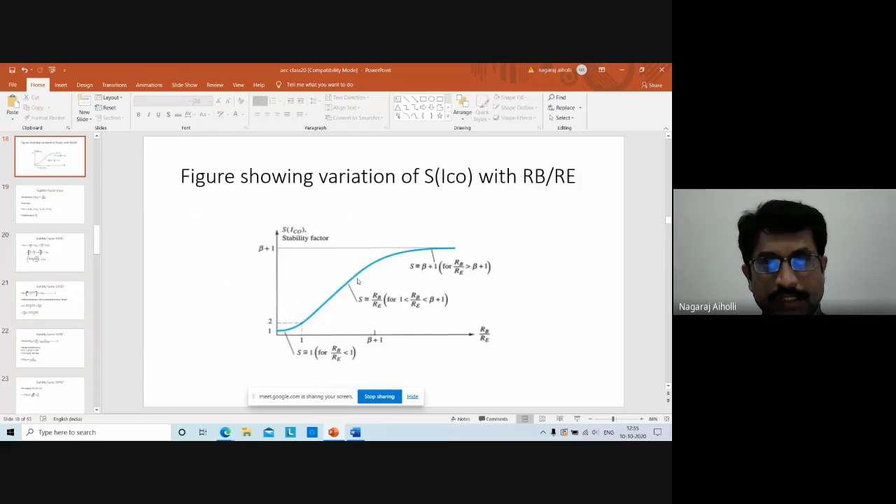In yesterday's class, we had discussed the stability factor, right? We had considered the emitter bias circuit, S of beta. We have derived that. So to derive the S of beta equation, we find delta IC by delta beta, but we don't differentiate IC with respect to beta; we perform delta IC by delta beta.

To perform delta IC by delta beta, we have to take the input loop and write the equation for the input loop in terms of IC and IB, because IE is approximately equal to IC, and IC is equal to beta times IB, or IB is equal to IC by beta. So we'll get the equation in terms of IC and beta for the input loop of the emitter bias circuit.

If I take this VB to the other side, it will be VCC minus VB. Then I will take two conditions: IC equal to IC1 and beta equal to beta1 at temperature T1, and IC equal to IC2 and beta equal to beta2 at temperature T2. I write the equations for IC1 and IC2, then I divide equation 4 by 3. On simplification, I get this equation.

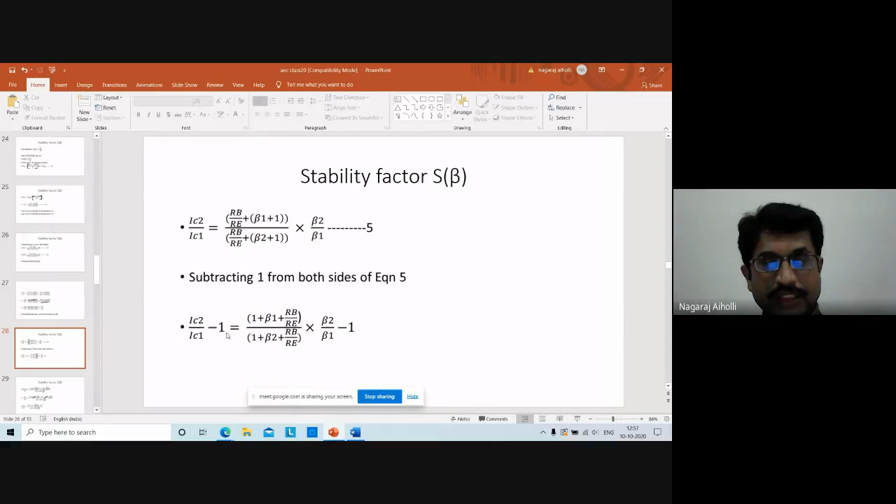IC2 by IC1 is equal to RB plus beta1 plus 1 into RE into beta2, divided by RB plus beta2 plus 1 into RE into beta1. If I divide numerator and denominator by RE, I get this equation. Then I'll subtract 1 from both sides of the equation, on LHS and RHS, and simplify it further.

On further simplification, I get delta IC by IC1 is equal to beta2 minus beta1 plus RB by RE into beta2 minus beta1, divided by beta1 into 1 plus beta2 plus RB by RE. Now I'll express it in terms of delta IC by delta beta. Because beta2 minus beta1 is common in the numerator, I take it as common: beta2 minus beta1 into 1 plus RB by RE, divided by beta1 into 1 plus beta2 plus RB by RE.

The delta beta goes to the LHS denominator, and IC1 comes to the numerator on the RHS. So the equation is delta IC by delta beta, that is S of beta, equal to IC1 into 1 plus RB by RE, divided by beta1 into 1 plus beta2 plus RB by RE.

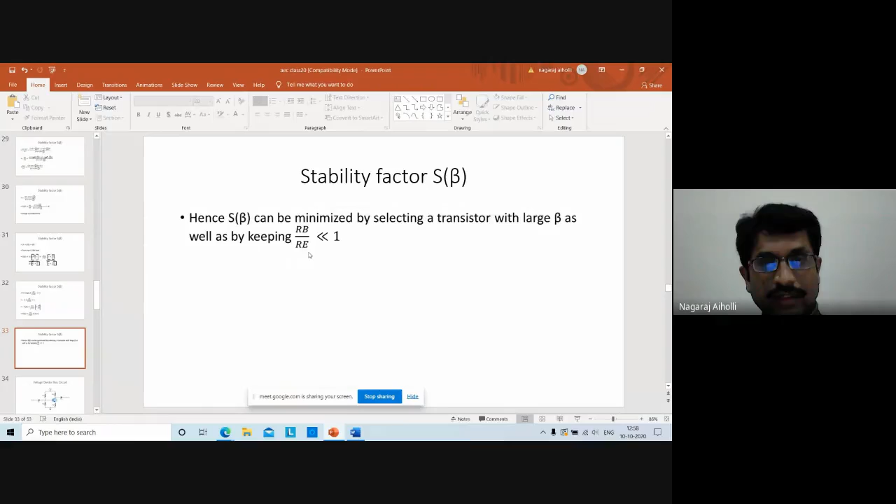Then we consider the design considerations. 1 plus beta2 is approximately equal to beta2, so we simplified S of beta. For S of beta to be minimum, beta has to be large, or 1 plus RB by RE should be lesser, that is RB by RE should be less than 1, so that S of beta is also less. S of beta is directly proportional to 1 plus RB by RE.

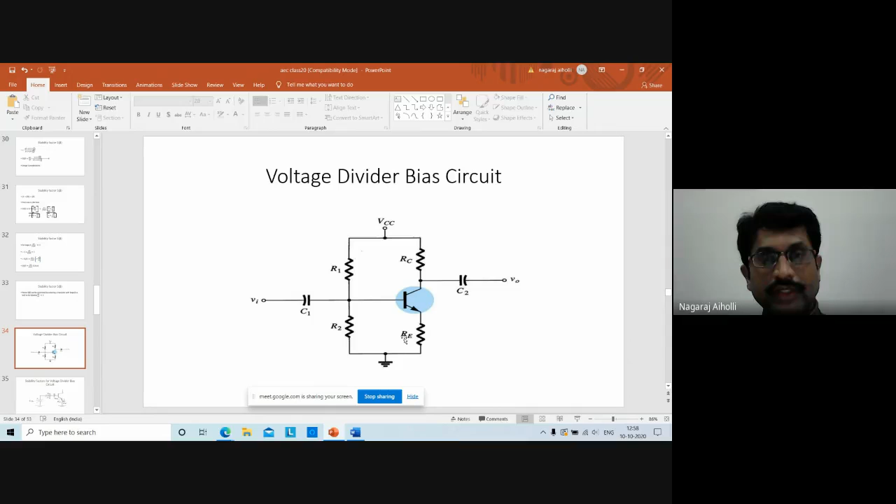Then later we took up the next circuit, that is the voltage divider bias circuit. We applied the input path, input loop. Okay, we got the equations. Then I expressed IE in terms of IB and IC for the input path equation, that is VTH is equal to RTH IB plus VBE plus IE RE.

Then I differentiated this above equation. Now I am getting the stability factor S of ICO, right? For S of ICO, what we have to do? We have to take the equation of the input loop. Once we get the equation of the input loop of that circuit, then differentiate that with respect to IC, keeping VBE constant, because I want the equation in the form of dou IB by dou IC.

That is what is required, because the general expression for S of ICO is 1 plus beta divided by 1 minus beta into dou IB by dou IC. So I want the expression for this, dou IB by dou IC. Then on further simplification, I get the equation in the form of dou IB by dou IC. This I will substitute in that general expression.

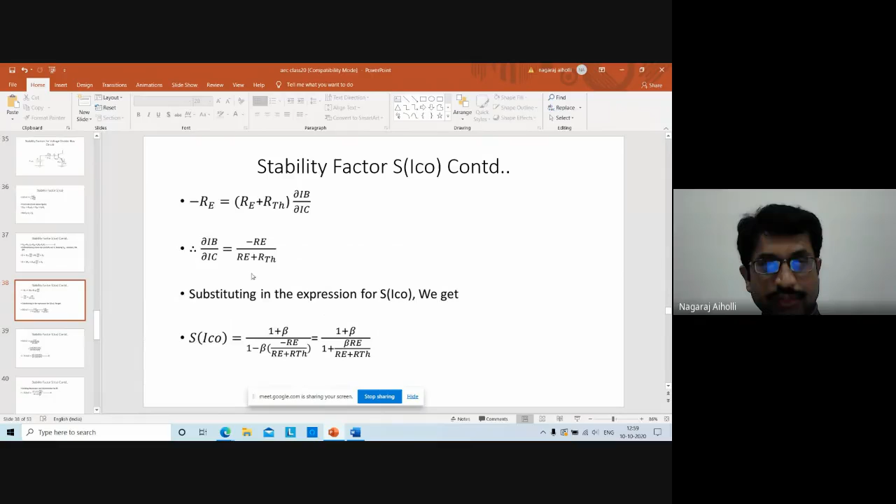So on further simplification, I will get the equation as S of ICO is equal to beta plus 1 into 1 plus RTH by RE, the whole divided by beta plus 1 plus RTH by RE. Okay. So we had discussed up till here. Next, in continuation, design considerations. So for the S of ICO we derived in yesterday's class, we have to consider a few of the conditions.

So the condition that we are considering is this: beta plus 1 into RE is greater than RTH. Here RE is the LCM. So beta plus 1 into RE plus RTH divided by RE will come in the denominator. Yes or no? What will be in the numerator? If you take RE as common, it will be beta plus 1 into RE plus RTH divided by RE.

In the numerator we have beta plus 1 into RE plus RTH by RE. In the denominator it will be beta plus 1 into RE plus RTH divided by RE. So RE in the numerator and RE in the denominator will get cancelled. The condition is beta plus 1 into RE is greater than RTH.

Therefore, S of ICO will be approximately equal to beta plus 1 into RE plus RTH; RE in the numerator and RE in the denominator have got cancelled. Then in the denominator, because beta plus 1 into RE is greater than RTH, we get simply beta plus 1 into RE. Right? So beta plus 1 into RE plus RTH divided by beta plus 1 into RE. This is the expression for S of ICO.

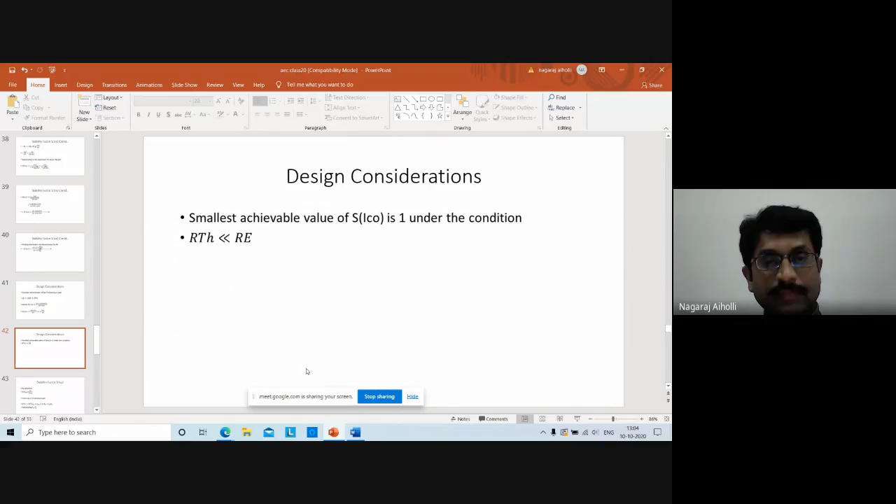Next, stability factor S of VBE. First we derived S of ICO. This is the S of ICO equation, what we did yesterday, and this is a design consideration for S of ICO. Next we will be deriving S of VBE. For which circuit? We are studying which circuit here? Voltage divider bias circuit. Is it not? Equation for S of VBE is dou IC by dou VBE.

Dou IC by dou VBE from equation 2 of the previous topic, or you can directly apply the KVL equation to the input path of the voltage divider bias circuit. So if you apply the KVL equation to the input path, the equation that we get is VTH is equal to RTH IB plus VBE, because there is VBE drop, there is RTH Thevenin's resistance, and equivalent Thevenin voltage is VTH. VTH is equal to RTH into base current plus VBE plus IE into RE.

Actually, it is IE into RE, but IE is expressed as IB plus IC. So we get IC into RE plus IB into RE. IE is IB plus IC, right? Expand that IB plus IC into RE. So IB into RE plus IC into RE, correct? Now next we have IC is equal to beta into IB. Yes or no? IC is beta times IB, or IB is equal to IC divided by beta.

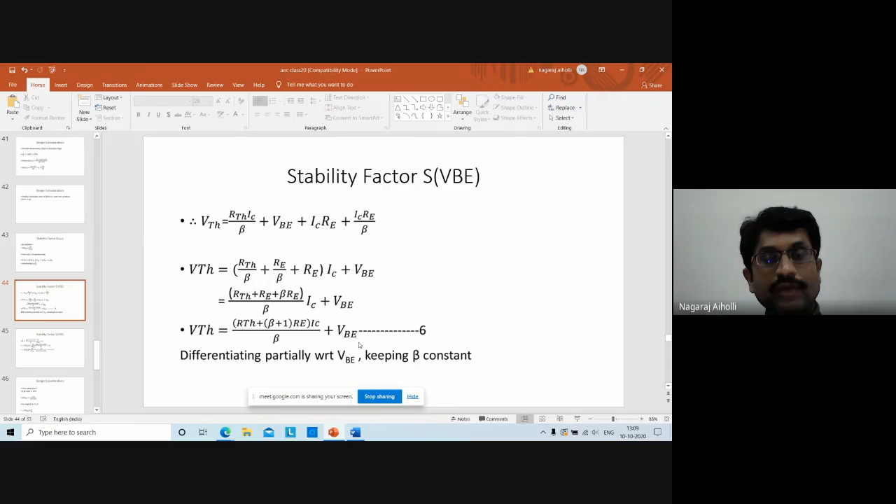So constant into differentiation of IC. Differentiation of IC is how much? We are differentiating with respect to VBE, so we get dou IC by dou VBE. Then differentiation of VBE is how much? What is the differentiation of VBE with respect to VBE?

Mahadev, can you tell me? Mahadev? Mahadev Adair? Mohammed? Mohammed?

Differentiation of VBE with respect to VBE is how much? We are differentiating with respect to VBE. So if we differentiate VBE with respect to VBE, what will we get? 1. Correct, you are right. It is 1. So it is plus 1. Differentiation of VBE with respect to VBE is 1. Fine.

Therefore, we will simplify it further. So S of VBE should come next here. It is dou IC by dou VBE multiplied by RTH plus beta plus 1 into RE by beta, equal to -1. This plus 1 I will take to the other side; it will be -1. I'll rearrange the terms and I get the equation for dou IC by dou VBE.

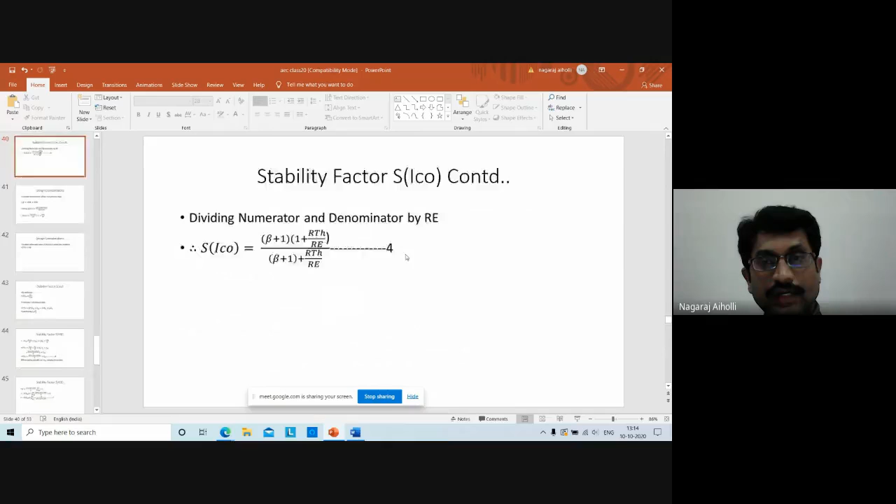Next is S of beta. So first, what was the first derivation? S of ICO here, right? Then S of VBE. Then next is S of beta, the third stability factor. From the definition, what is S of beta, students? It is given by what equation?

S of beta is the change in collector current with respect to current gain, that is beta. Beta is the current gain, output current by input current. So S of beta is delta IC by delta beta. For the derivation of S of beta, we are not performing dou IC by dou beta. The same thing we observed for the fixed bias circuit, the emitter bias circuit, and the voltage divider bias also. We are taking the same method, that is we are finding delta IC by delta beta.

So from equation 6. What is equation 6 here? Apply the KVL equation to the input loop of the voltage divider bias circuit. Then we get VTH is equal to RTH plus beta plus 1 into RE into IC divided by beta plus VBE. We can apply KVL to the input loop and take that equation here.

Now here we are not differentiating. Remember, whenever it is the derivation of stability factor S of beta, we are not performing the partial derivative. But rather we take delta IC by delta beta. Remember this method. Now, how do we take delta IC by delta beta? We apply the KVL equation to the input loop of the voltage divider bias circuit here.

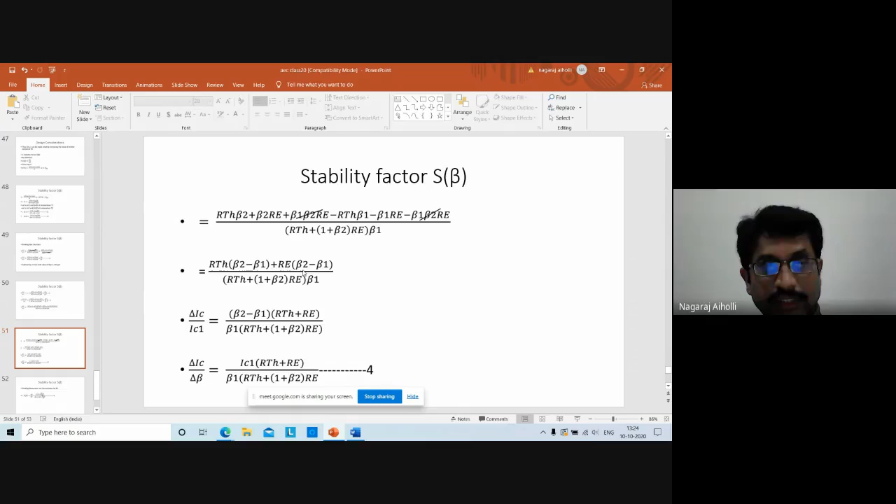So in this equation again, in the numerator beta 2 minus beta 1 is common. Take it outside. That will give us delta IC by IC1 is equal to beta 2 minus beta 1 multiplied by RTH plus RE, the whole divided by beta 1 multiplied by RTH plus 1 plus beta 2 into RE.

Now this beta 2 minus beta 1 is delta beta, change in beta. So take this IC1 to the RHS, it will come to the numerator. Therefore, we get delta IC by delta beta is equal to IC1 into RTH plus RE, the whole divided by beta 1 into RTH plus 1 plus beta 2 into RE. Take it as equation 4 here.

Next step, what is the next step here? We have to divide numerator and denominator by RE. Once we do that, what is the equation that we get here? Delta IC by delta beta is equal to IC1, and inside it will be RTH divided by RE, then plus RE by RE is 1, so it is plus 1.

That divided by beta 1 into RTH divided by RE plus 1 plus beta 2 into RE divided by RE. RE and RE will get cancelled and we get only 1 plus beta 2. So the S of beta equation is delta IC by delta beta, the required equation: IC1 into 1 plus RTH by RE, the whole divided by beta 1 into 1 plus beta 2 plus RTH by RE.

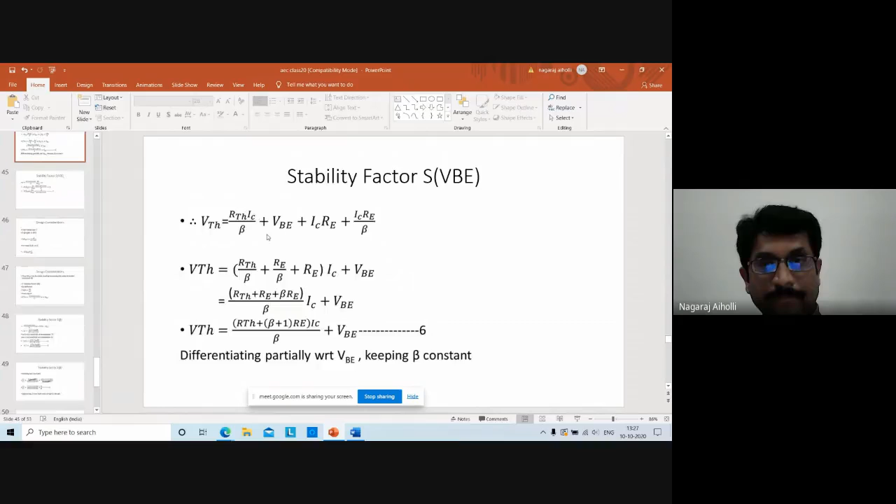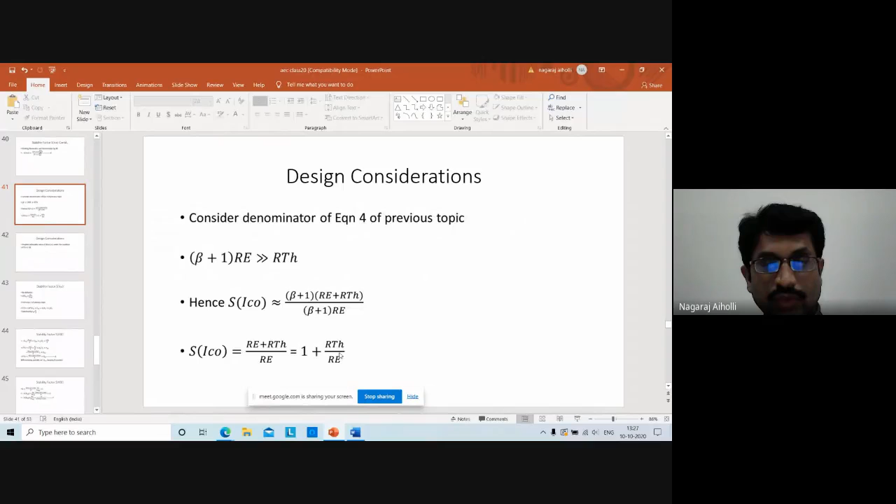Okay, this was our first one here. Design consideration for S of ICO. For that we arrived at the equation S of ICO is equal to 1 plus RTH by RE. This equation we got here. Then next, stability factor S of VBE for the voltage divider bias circuit.

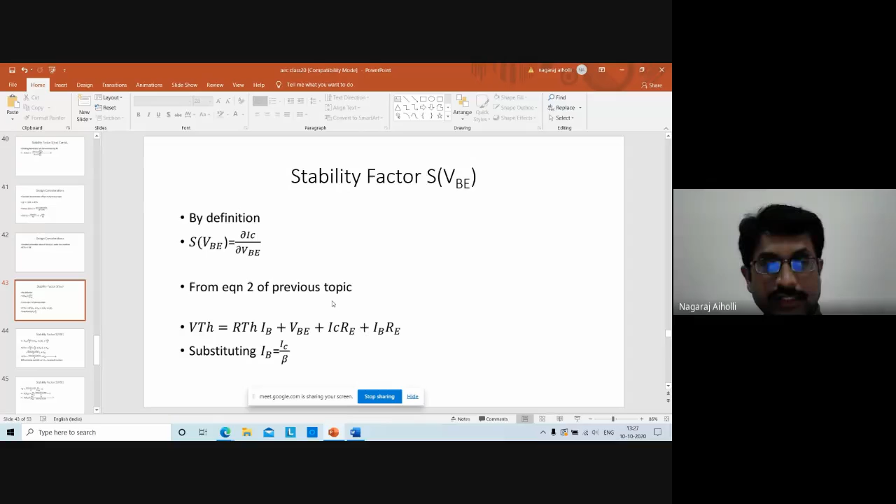Again, we derived the equation for that, considering the input loop of the voltage divider bias circuit, applying KVL to the input loop of the voltage divider bias circuit. We got this equation. Then on further simplification, we got the equation as S of VBE is equal to minus beta divided by RTH plus beta plus 1 into RE.

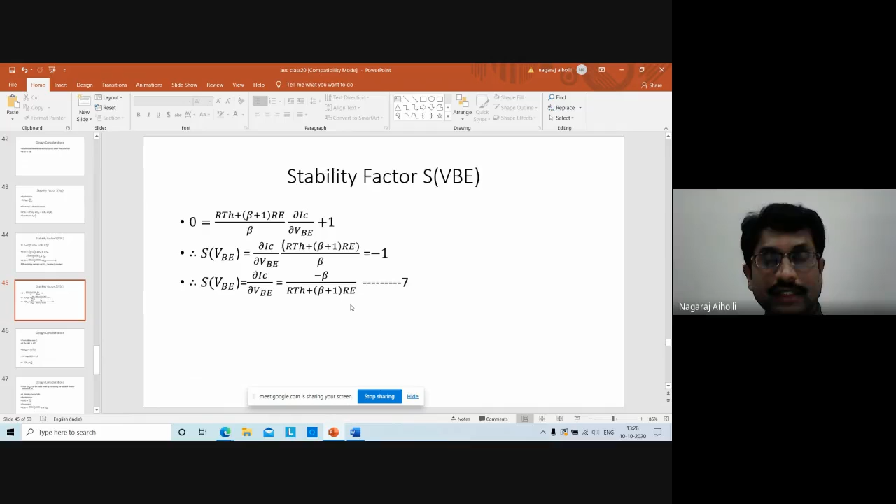You have to do it step by step. These derivations are such that one step is linked with the previous one. So start from the basic equation, the fundamental KVL equation, then go on step by step, so that finally we'll arrive at the required equation. Then this is beta plus 1 into RE greater than RTH. This design consideration we assumed here, so that we got S of VBE is equal to minus 1 by RE.

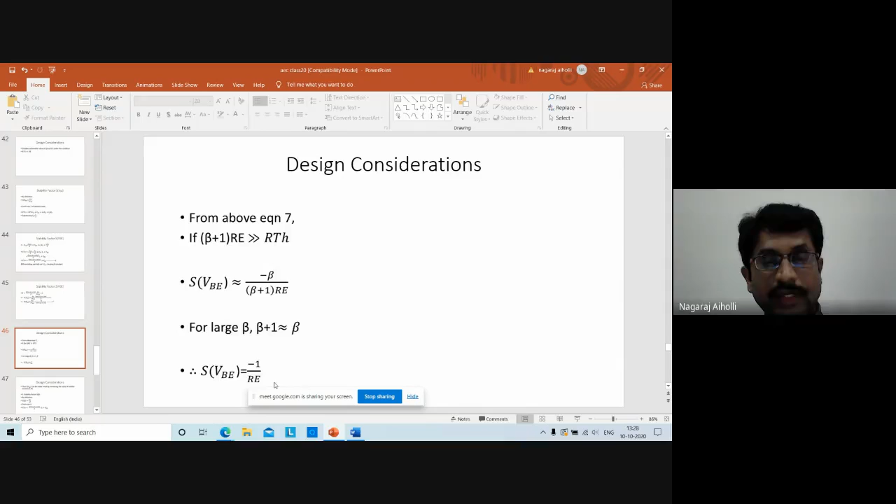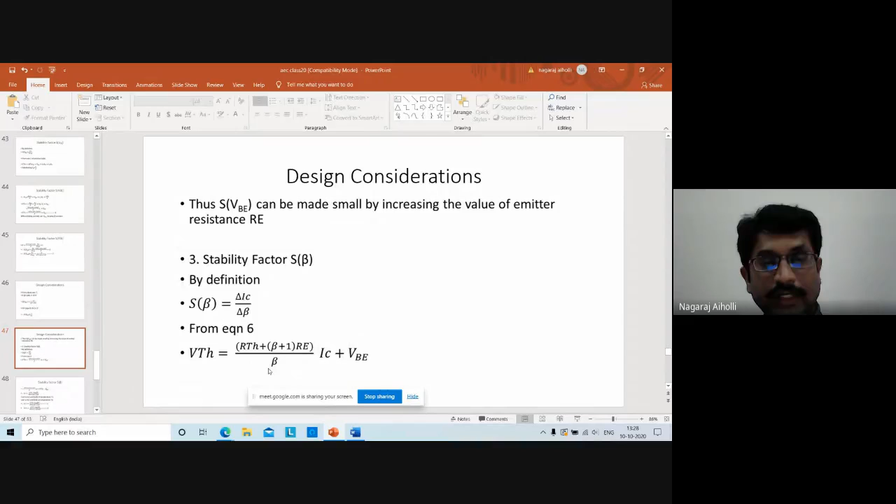Next, we derived S of beta. The basic equation is delta IC by delta beta. We are applying various steps for getting this S of beta. The first step is we consider the input loop equation in terms of VTH for the voltage divider bias circuit. I'll express it in terms of IC and beta. That is IC is equal to beta times IB, or IB is equal to IC by beta. If we substitute that, we get this equation for VTH.

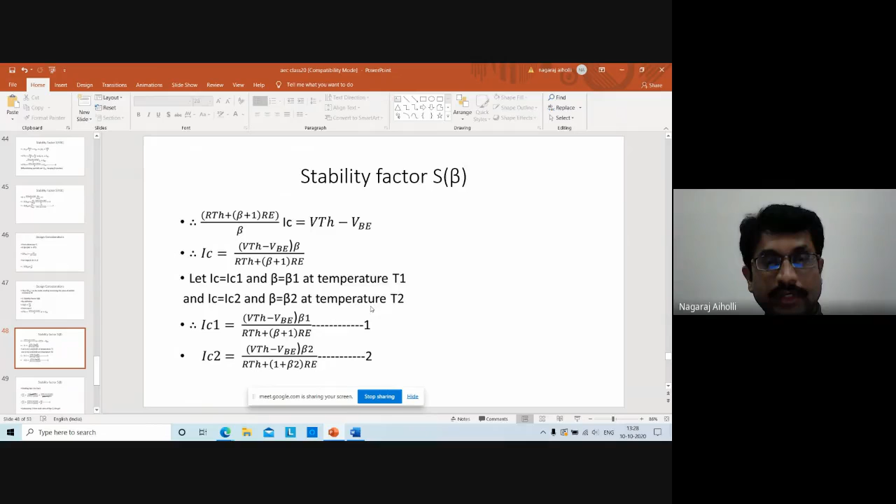Then on further simplification, I am applying the conditions: IC equal to IC1 and beta equal to beta 1 at temperature T1, and IC equal to IC2 and beta equal to beta 2 at temperature T2. Once we get those equations for IC1 and IC2, I divide one equation by the other and simplify further. I get this equation. Then I subtract 1 on both sides of this equation, whatever I'm getting as IC2 by IC1.

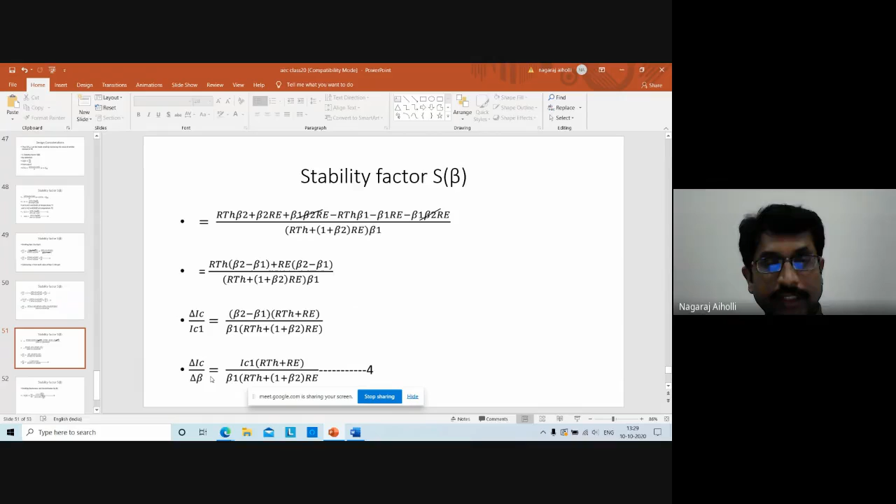Then on further simplification, I get it in terms of delta IC by delta beta. The last step is to divide numerator and denominator by RE. Once we do that, we get the final equation as S of beta equal to delta IC by delta beta, that is IC1 into 1 plus RTH by RE, the whole divided by beta 1 into 1 plus beta 2 plus RTH by RE.

Okay. So that's all for today's class, students. Any questions here? Any doubts? Any problem in understanding here, students?

Ratan, is it understood? Ratan? Birje? Ratan? Kaji, is it understood here? Yes, sir. Kaji, clear? Yes. Any problem in understanding? No, sir. Understood the derivation, right? Yes. Sanket, understood? Yes, sir. Clear, right? Yes, sir. Shubham, understood today's derivations? Any problem? No, sir. Clear, right? Yes, sir. Okay.

Pratmesh? Pratmesh Patil? Tejas? Tejas? Vivek Goni? Vivek? Jocelino, understood today's derivations? Yes, sir. Any problem in understanding here? No, sir. Clear with the derivations, concepts, everything? Yes, sir. Okay. Any questions, any doubts, any clarifications? No, sir. Okay.